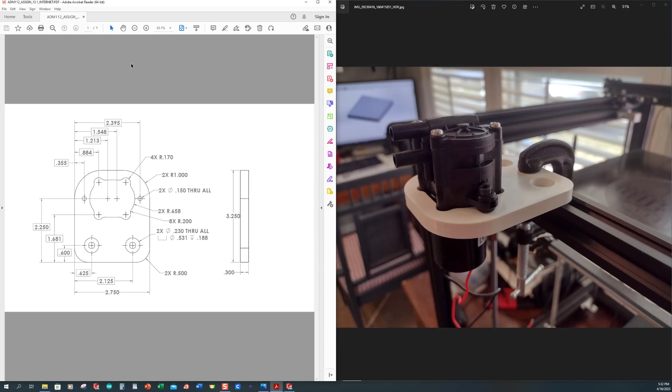Alright, so let's go ahead and use a little cleaned up version of our drawing so we can see it, via the internet. I'm going to close this down, expand this fully. That's going to be good.

So let's get started with it, and the main thing is this shape here. It looks relatively complicated, but it's not. Basic shape overall, it's a simple rectangle, 2 3/4 wide, 3 1/4 tall, and it's going to be 0.300 thick. And then we have this little funky looking shape right here. The other holes are basically just a simple hole up here at the top and a counterbore hole, and then a couple radiuses at the top and a couple fillet radiuses at the bottom as well.

Alright, so let's make sure that you got SolidWorks open, and we want to start with inch, pounds, and seconds. So let's create a new part, and we want to verify that it is in inches down at the bottom right hand corner. So inch, pounds, seconds is what's showing up.

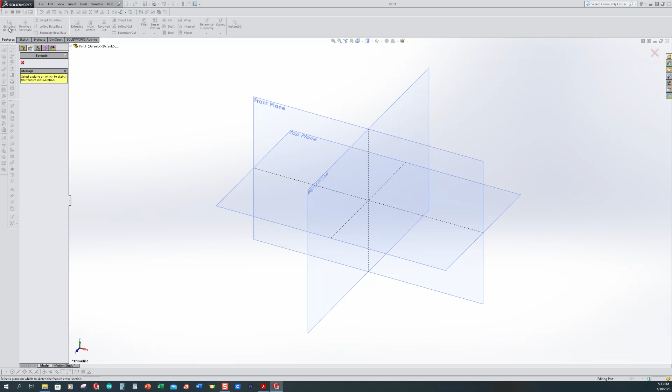So let's start with an extruded boss base. I'm going to hover over the top plane, and that's the one that I want to use to begin with. I'm going to come up and select a center rectangle, pull it up, place it, and we said that we grab a smart dimension, and we said it was 2.75 wide and 3.25 tall.

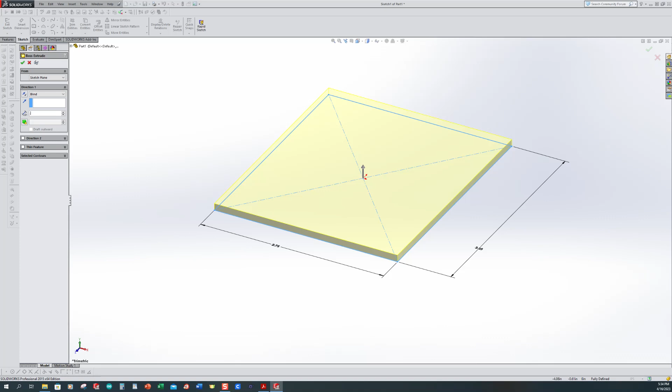Alright, and we exit this sketch. We should be in the extrusion, and we want to be blind, and we want it to be 0.3. Go ahead and accept that. Use my F button for fit.

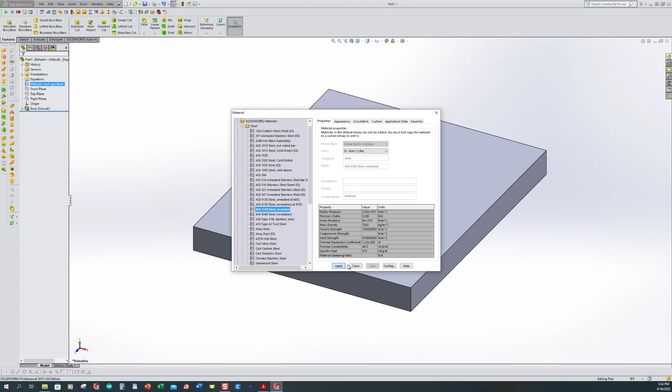Let's go ahead and change our material. So I want to right click on the edit material. It's going to be in the steel. I'm just going to say it's a 4340 annealed. Apply and close. So now we've got some material properties and some mass and everything else out there.

This will be a pretty heavy part. So the next thing that we want to do is we want to cut this shape out. Now I could make this shape very, very complicated if I wanted to, but we know that the center of these radiuses is going to be 2 1/4 up. The radius is going to be 0.658 here, and then we have a positional tolerance of 1.213 to the center of this one and 1.548 to the center of that one.

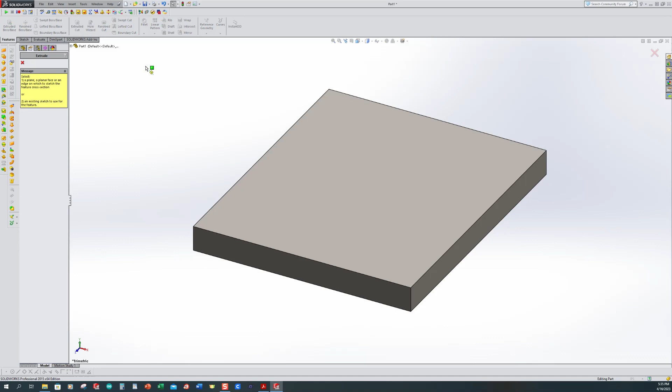Alright, so let's start with an extruded cut. I want to pick this face. It should rotate normal to you. I want to pick a straight slot, pull it out, make sure your line is horizontal, place it here. And we said that the radius was 0.658. So we'll go ahead and place that.

Then the next thing was a position from here to here. That's going to automatically default to the center. And that was going to be the center of this, 1.213.

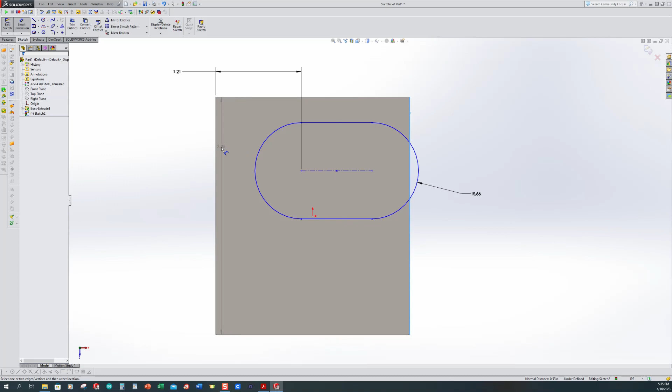And then we got a position from here to here. Now if I pick this, I'm going to have to reverse my dimension. So I'm going to go grab the center. I'm sorry, I wanted to pick from this edge to the center of my circle. I want to place it here. So that position from the left hand side, this datum A, was going to be 1.548. So we're going to say 1.548.

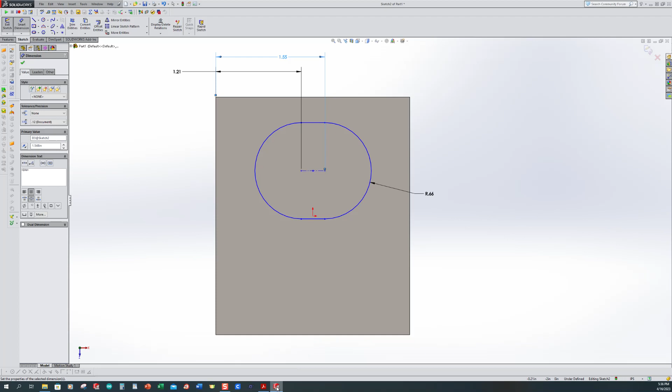So that's the basic shape of this. Now we have to position it up and down. I think it was 2 1/4 from the bottom, and it is. So we're still in Smart Dimension. Pick the bottom edge, pick one of your radiuses, and that's going to be 2.25.

We are now fully defined. I'll know that by looking at the bottom right hand corner. My sketch turned from blue to black. So we're ready to make our cut. So we had selected extruded cut to begin with.

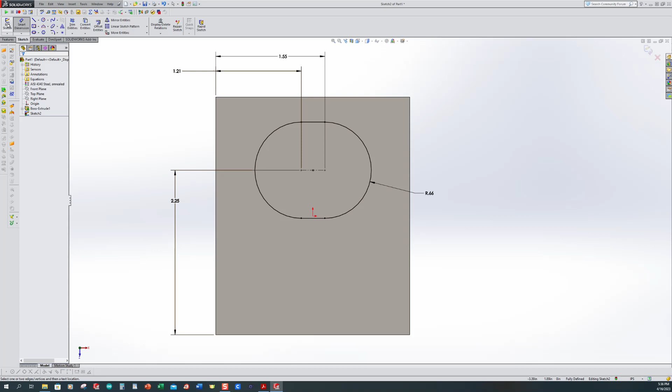So when we exit our sketch, we're going to select the extruded cut, and I want to select through all instead of a blind depth. So go ahead and accept that.

Now, this doesn't really look like this, but if we look here, it's just a simple circular type shape. It looks like it's called out as a radius right now, but we can just put circles out here. It's easier to cut air than it is anything else. So let's come up and select extrude cut again. We want to pick this front face that we're looking at.

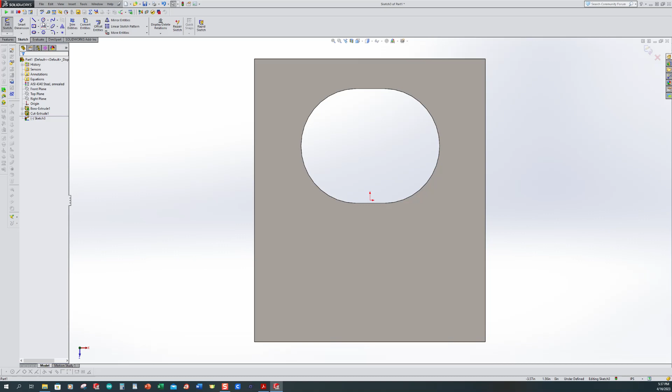I'm going to put 4 circles out here. Now, this one is still baby blue and the rest of them are dark blue, but I want to come up and add a relation. So one of the arcs is selected. That's going to be that one. I pick this one, and this one. So I have all 4 of them.

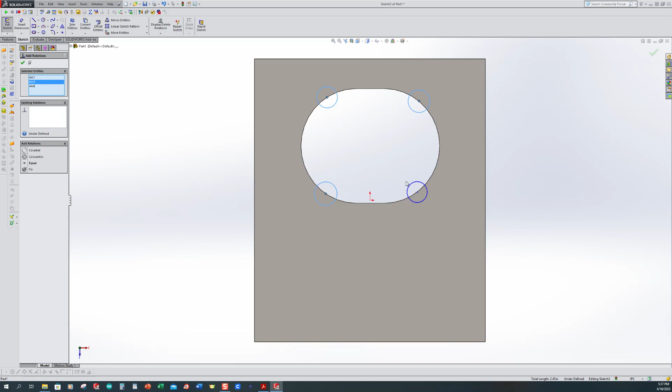I want to make sure that those are equal. Now, another couple relations that I want to add. I think I want to add 2 more. I'm going to pick the center point of my top circle and the center point of my other top circle.

I want to make those 2 horizontal from one another. I also want to pick the center point of my bottom circle and the center point of my other bottom circle. Make sure that you only have those 2 selected, and I want to make those 2 horizontal from one another as well. Alright, so when we look back at our drawing, it says that this radius is 0.17.

When we select our dimensions and place it, it's going to be double that, so that's going to be 0.34, and then we'll worry about positioning these things. I think we're only going to have 2 positions to fully define this. So let's select Smart Dimension, pick any one of the circles and make sure that they all change. So that's going to be 0.34.

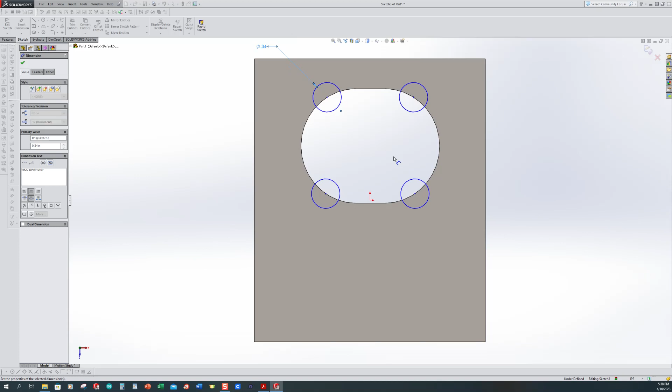And now I want to place a dimension from the bottom up, I believe. So that's going to be 1.681, coming from datum B up to the center of that circle. So we're still in Smart Dimension. I pick the bottom edge, pick the circle, and I've already forgotten what it was, 1.681.

Notice both of these are turned black, so it's tied those up. It's fully defined those because we have a size, a location, and a face that they're selected on.

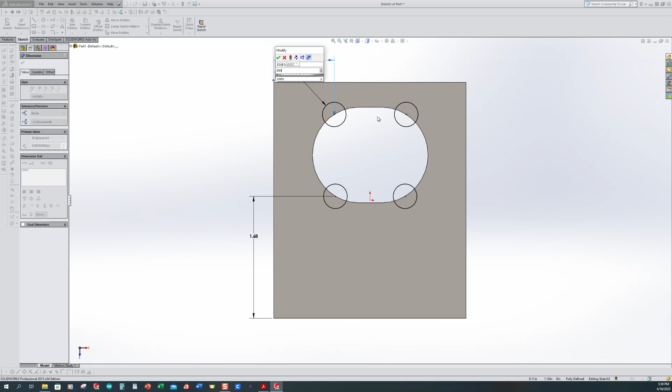Now I've done something a little bit different, so I think we're going to come over from the top left hand side. Now it's kind of strange, but we've already located those circles in a couple different ways. So we're going to come from datum A over, and it's 0.884. So we should still be in Smart Dimensioning. I'm going to pick this left edge, pick my circle, pull it up, place it down, and that's going to be 0.884. Alright, so there's where those circles are.

We are fully defined, so we can exit this sketch. We should be in the cut extrude still. If not, go ahead and select cut extrude. And we want to cut through all because we don't have to worry about it again if we change the thickness of our part. So now we've got this kind of a Garfield looking shape right here.

So we come up and we look, and it says that we have another fillet radius right here. There's 8 of them, and they're 0.2. So let's come back down here. Let's select a fillet and change our size to 0.2.

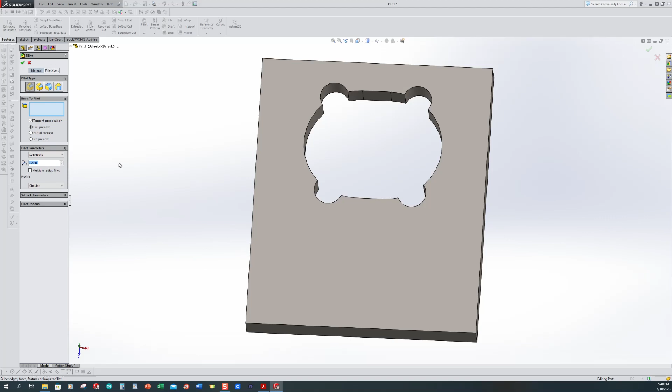Now I'm going to show you a different little trick right here. I'm just going to pick one edge, let this flyout open up, and if I hover over these flyouts, it shows me everything that I can do that I can select with one click. I want to click these other 7 edges. So I select it, it gives me the preview, and that's what I'm looking for.

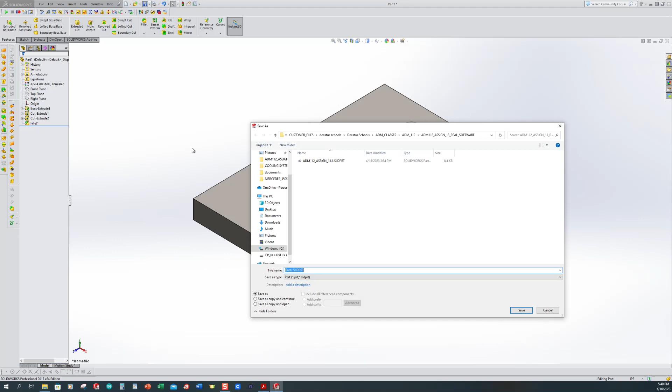Alright, so I'm going to use the Control-7 command. I need to save this. I always name mine junk. You name it for whatever your part number is supposed to be called.

Alright, so the next thing I want to do, let's go ahead and place these 2 holes right here. They're 2 1/4 up. They're 0.150 through, and we have locations of 355 and 2.395. So I'm going to use the 150 and the 2 1/4, and then we'll come back and look at the rest of the dimensions. Alright, so let's use a hole wizard.

I'm going to use the simple hole command. I'm going to make sure that I show custom sizing. I've already got mine called out as 0.150 because that was the last thing that I'd used before. Alright, so now we've got all this.

Let's make sure that we don't have anything else like a near side or a far side countersink selected. So I'm up to positions. Now it's going to ask us what face we want to place our holes on. I want to place it on this face here.

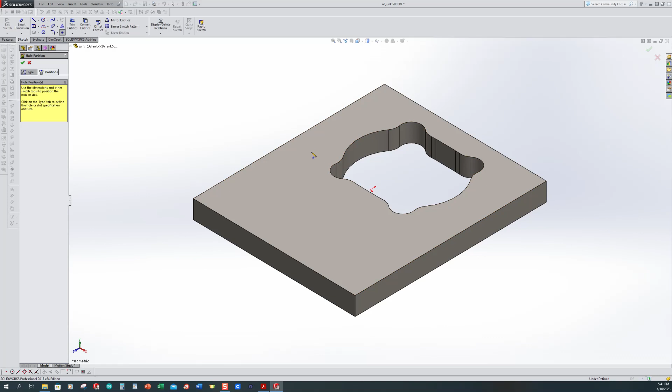I'm going to use my Control 8 command just to orient it. Now I'm just going to place it out here somewhere. Don't really know where they're supposed to be or anything else. Now I want to add a relation.

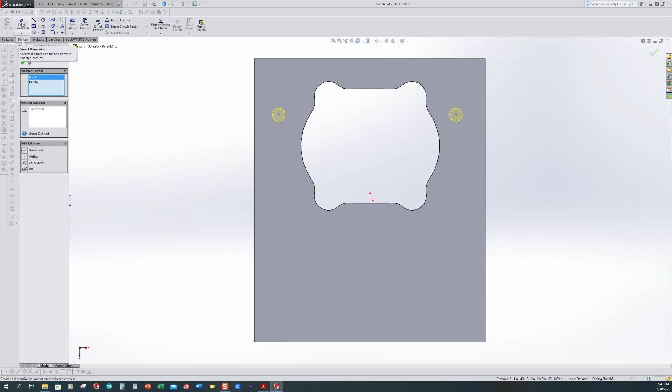So notice the last point that I selected is still highlighted. I'll come select my other one, and I want to make those two horizontal from one another. Alright, so I'm through with relations. I want to add a smart dimension. So I'll come select smart dimension command. I'm going to pick this bottom edge and the center point of the circle, and it was going to be 2.25. Alright, they're still blue, but they rotated, they moved around.

Alright, so we're looking at 0.355 to the center of this hole. So we're still in smart dimension. I select the left edge, I select this center point, and that was 0.355. Now the next position of this hole is going to be 2.395. So from datum A, I come over here and I look, it's got a basic dimension of 2.395, and we're going to select this hole here. So smart dimension from the left edge, center of this hole, 2.395. So that hole is fully defined.

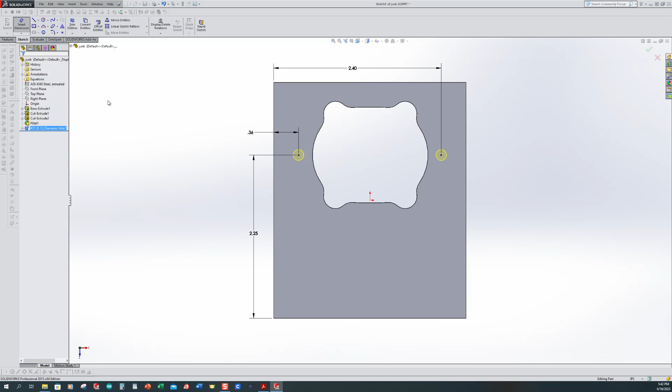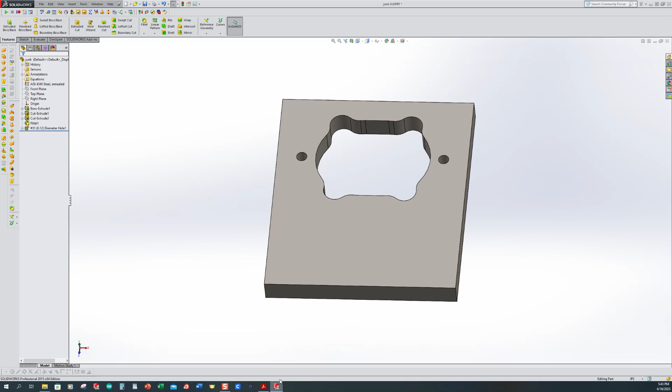This one is fully defined. We look down here at the bottom right hand corner, we are fully defined, so we're ready to accept this hole feature command, and we accept it, and we now have two holes in here. Now the next thing that we want to do is select a counterbore feature. So it looks like we have two times. They're 0.230 through all. The counterbore diameter is going to be 0.531, and the depth of this is going to be 0.188 or 3/16. Alright, so let's come back and select the hole wizard one more time.

We want to select a counterbore. We want to show custom sizing. So our custom sizing, the through hole diameter, notice if you hover over it for any length of time, it tells you what it is. So it's going to be 0.230. The counterbore diameter is going to be 0.531, and then the depth of that counterbore is going to be 0.188. Okay, make sure that none of this other stuff is selected, so we don't want any head clearance or near side. We've already given it all the parameters that we want here by using our custom sizing.

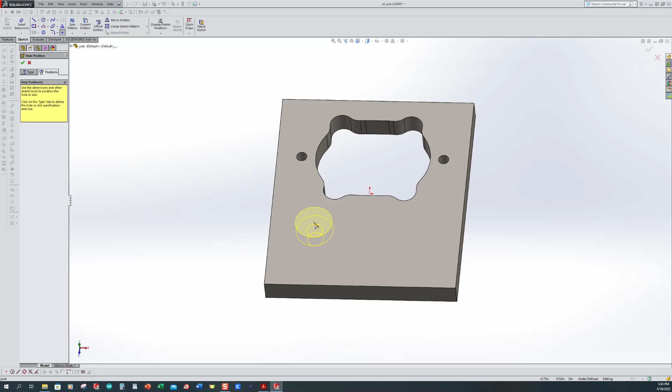So positions, same face. We want to select the positions. I'm going to pick this face. I'm going to use my Control 8 command just so we can see it. So I'm going to place one here, and I'm going to place another one. I'm just going to move it up just a little bit to make sure that we show that it's askew. Alright, so now let's add a relation. As I'm adding a relation, this point is already selected because it's highlighted baby blue. I would like to select the other point, and I want to make those two horizontal from one another.

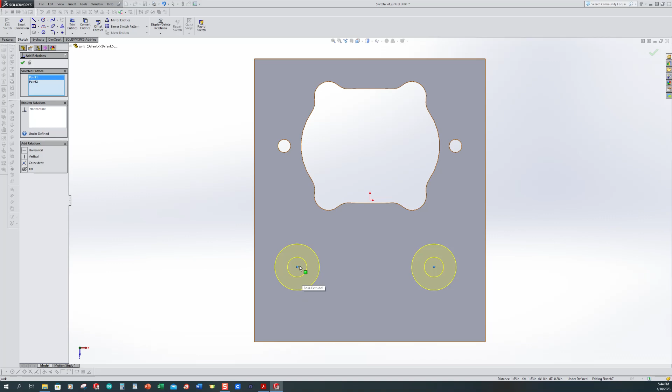Alright, so now we've got to locate these things up, and we've got to locate them side to side. I think we're going to have 3 dimensions on here. So coming up, we've got 0.600 and then 0.625 across. We'll come back and look at that. So smart dimension, so up to here, the location is going to be 0.6. We're still in the smart dimension command, so I'm going to select my left edge and the center point of the first hole, and that was 0.625.

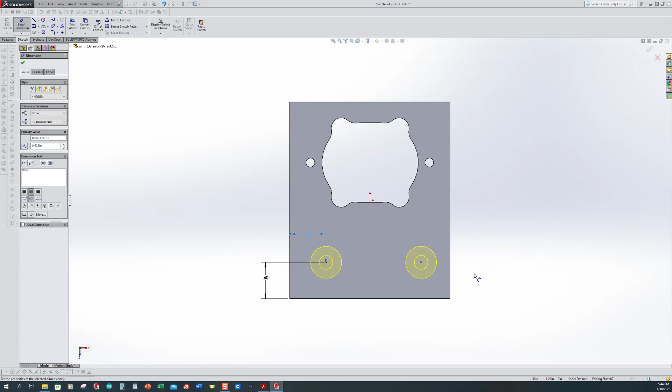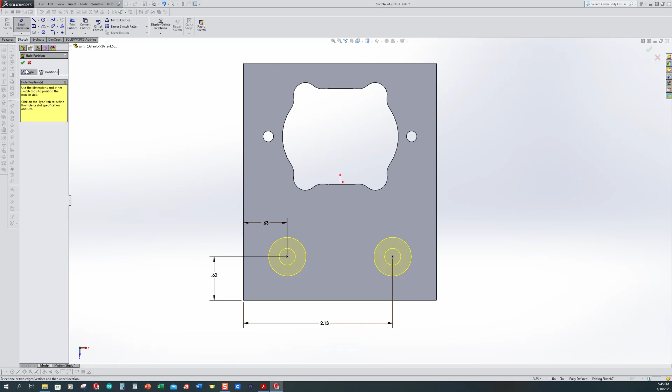And now the next dimension that we got is the distance between here and here, and that's going to be 2 1/8, or 2.125. So select the left edge, center point of your circle, 2.125. Alright, I clicked out in the modeling space somewhere just to release that, and everything has turned from blue to black. I come down here to the bottom right, we are fully defined, so I'm going to go ahead and accept this, and that is the hole that we want in our part.

Now the next thing that we want to do is we have fillet radius up here at the top, and it looks like we've got 1 inch at the top and we have a 1/2 inch at the bottom. So let's go ahead and place those. So we want to use the fillet command. Select the fillet. So I'm going to say 0.5. We'll just pick the bottom one down here. Pick here and here. Let's give them a preview. Just make sure you got full preview selected if you want to see what it's going to look like. So we go ahead and accept that.

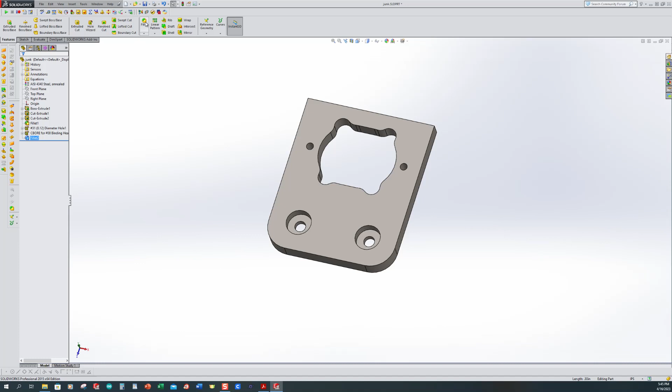And then we want to use another fillet command, and that's going to be 1 inch. So I'm going to come up and pick this edge, and if I hover over this, I can actually select it from looking through the part, and we want to accept that as well. So I'm going to use my Control 7 command to put it in isometric. I want to use my Control S to save it one more time, and that is going to be your finished part. So this is what you're going to create your drawing from.

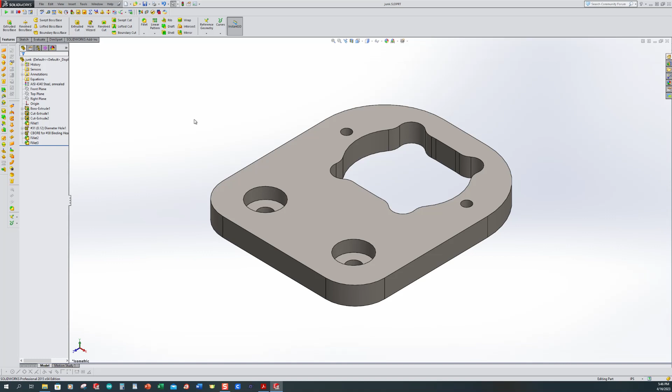Just make sure that you got it named in the proper naming format. Make sure that your drawing has its title block and all the changes on it, and submit that through your learning management system, and we will see you on the next one.